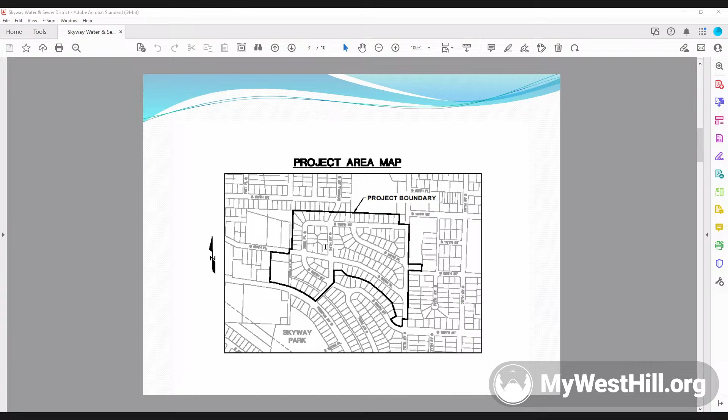Okay, here's the crux of the matter. The sewer mains in this area are more than 70 years old, past their 50-year life expectancy. We've had numerous maintenance issues and backups that have resulted in property damage, and the sewer mains are subject to infiltration and inflow—meaning fluids going into the sewer pipes that don't belong there because the pipes are so decrepit. The water mains in that area are more than 60 years old, well past their 50-year life expectancy. They have a history of repeated breaks, and they don't meet our minimum standards of 8-inch diameter.

The problem with main breaks is that they result in interruption of domestic or drinking water service and fire protection service to your house. There's the potential for water system contamination during repairs, and it's more costly to do repairs on the spur of the moment than when we plan replacement projects.

We've done basically two types of investigation. One is geotechnical borings for subsurface information, and field surveys to locate property lines and where the infrastructure is located.

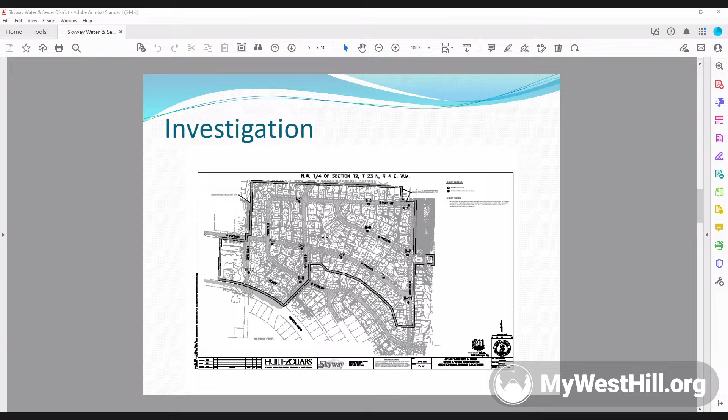What are the solution and the benefits? Well, basically the solution is to replace the pipes and service lines. The benefits are it will eliminate those costly emergency repairs. It reduces infiltration by putting in new pipelines. We reduce the sewage load on our downstream main sewer pump station, which gives us added capacity for development in the upland area, reduces the likelihood of property and environmental damage, and avoids increased costs due to insurance premiums resulting from claims.

Why are we doing this now? As more time passes and the infrastructure becomes older, the risk of a main break or a service interruption increases. The replacement costs for this project have been incorporated into the water and sewer rates over several years, and we have recently, as of last year, secured a low interest Public Works Trust Fund loan through the Department of Commerce.

Here's a very sketchy sketch of what we'll be replacing in that neighborhood. Again, this is a 60,000 foot level, so if it says 34 manholes, we might end up doing 35 or 33. But we'll be replacing the mainline sewers on those streets, along with the side sewers and the manholes.

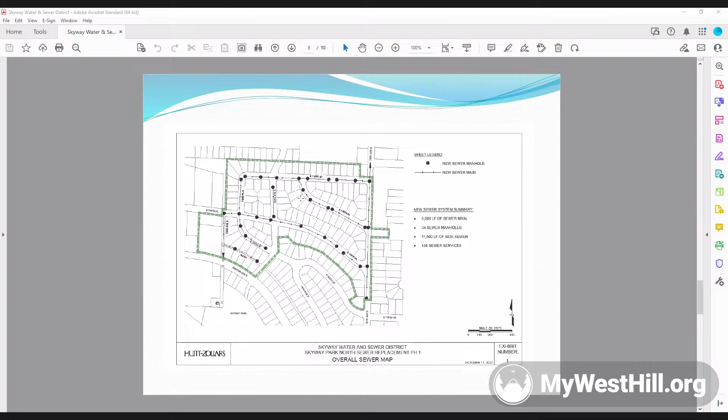To take advantage of this project, and because the water system is also in bad shape, we will be replacing the water lines and the hydrants in a similar area, along with the service lines to individual residences.

Any questions? And hopefully that's within my 5 minutes. Yeah, that was great. I have a quick question.

Your last line, you said you're replacing sewer lines to individual residents. So that means each home in that area is going to get a new sewer line? That's correct. I can't say to every home, Joel. That might be an area where we replace a main line and a property service line leaves the property in a different direction. But yes, we're allowed to replace the side sewer lines as part of a capital improvement project, because a degraded side sewer brings additional flow and other debris into the mainline system. So as a way of protecting a brand new mainline system, we're allowed to replace the side sewer.

Good question. Is there a process for inspecting those side sewers to see who's in more need of getting it replaced? Like maybe it's already kind of fallen apart with roots and whatnot. We will, unless someone declines to have their side sewer replaced, which they will have the option to do, be requesting a right of entry from customers because it will require us to go on their private property, and a property owner has the option to decline that. Or if they tell us it was replaced in the last year or two of their own volition, otherwise we would go ahead and replace it. So it's really the homeowner's choice, but it's to their benefit to take advantage of it, unless they have a brand new side sewer.

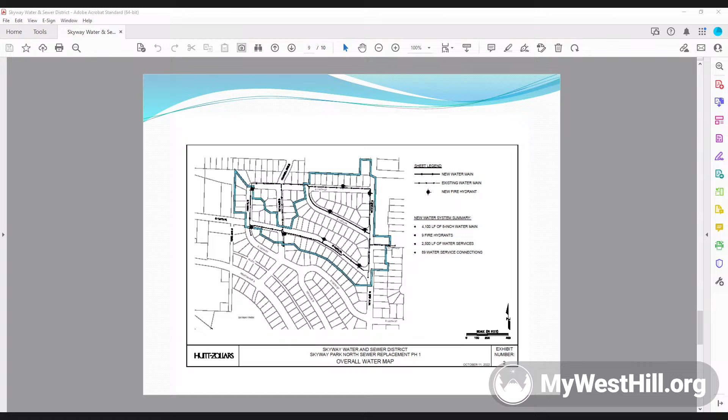So next up, we have an update from the King County Fire District 20 from Chief Hicks. I saw him on—do you have anything to share, Chief Hicks? Sure. Hello, everyone, and good evening. My name is Eric Hicks, I am your fire chief for King County Fire District 20.

Just a quick update: coming out of COVID, we're trying to bring back some of our programs. One thing about coming out of COVID is our call volume has increased. Over the last 2 years, we're looking at about a 26% increase in call volume, which means we're looking at hiring more staff. We're in a budget planning process now, and out of that we're looking at hiring 2 new firefighters who will start next year.

Along with that comes the aid car being in service, and that's something we're kind of dealing with. We're continuing to evaluate it.

Some of you may have seen one of our water rescue team members on Facebook. Some of you may not know, but we do have a water rescue team. It consists of 4 people in our department, one on each shift. So if we get a call down on Lake Washington or Coulon Beach or the Cedar River, there's kind of a regional approach to this. As far as our district, we'll be first on scene, and we can have somebody jump in the water and actually try to perform a rescue.

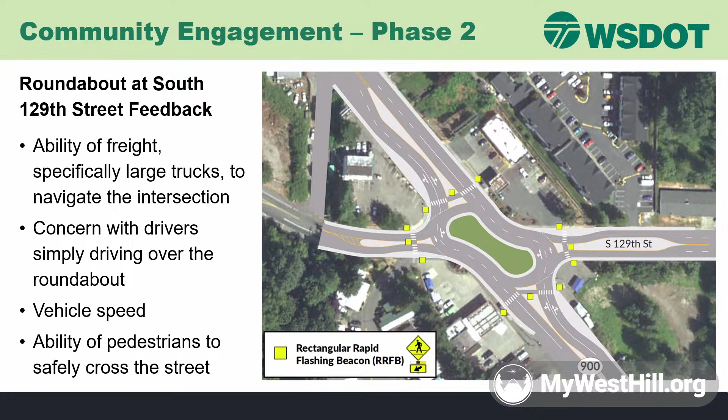There were also concerns, which we've heard throughout, about the speed of State Route 900—sorry, we're doing another study on 99 as well—about how they could slow down traffic on 900 and make this a safer place to be. And there was concern that this would be too hard to figure out for pedestrians crossing the street.

For the protected crossing at Creston Point Apartments, we asked a lot of questions about where people wanted to cross the street. Overwhelmingly, we heard less about where people wanted to cross and more about the concern over the location of the westbound stop and how far away it is from the eastbound stop. A lot of the feedback was that they weren't necessarily worried about where the crossing was—they just wanted that stop moved and the crossing to be convenient in order to access both the westbound and eastbound stops.

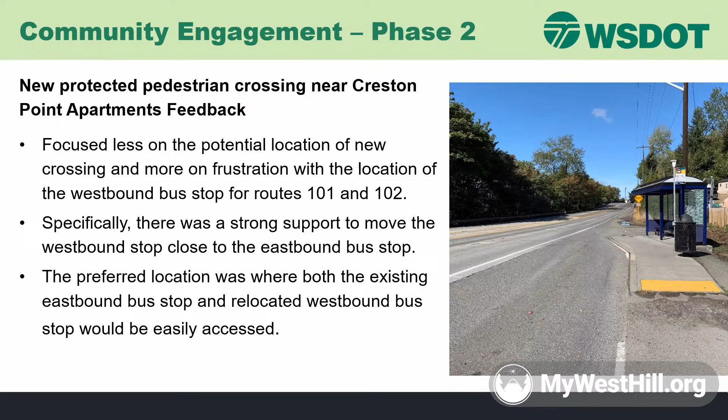A couple of updated concepts and things we can add to the report as we move forward. One of the things we need to add is that this is going to require an intersection control evaluation at South 129th Street.

What this means is anytime WSDOT or any other agency touches an intersection to do something to it—whether it's adding a signal or improving an ADA piece by putting in a bulb-out or something like that—we're required to do what's called an ICE. What that looks like is trying to understand what the best solution is to improve mobility at that intersection, looking at whether a roundabout makes sense and what other pieces we could consider.

As we look through this, if we have a recommendation for a roundabout, one of the important critical pieces is doing that study, interacting, and sharing that feedback to make sure it's the right solution based on a deeper data analysis.

Additionally, one of the details I'd like to add to the report is related to traffic calming. Speed is something we heard throughout this process over the last two years, so emphasizing and adding information on how this could become a way to slow traffic as it's entering the community. As you get off I-5 and come southbound, there's very little to slow down the traffic, especially if the light is green and you can go straight through. So this would help with that piece.

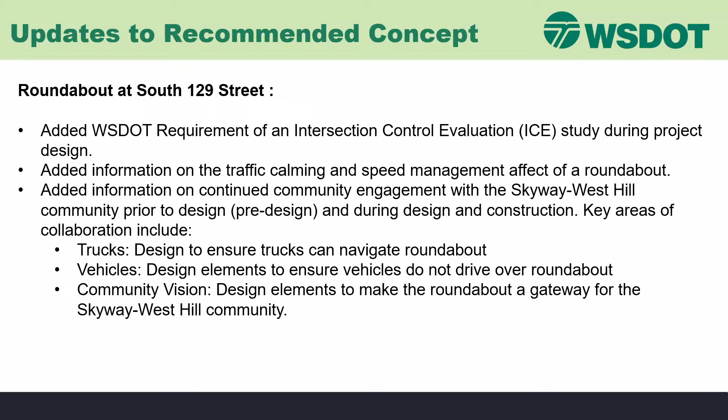Fundamentally, one of the big pieces that really resonated when I heard it was making sure the roundabout is a gateway to the community that is led by the community. Those are the pieces I think would be important to add, so we can give some depth on what the next steps are for the 129th intersection. First, to assess if it's the right solution by doing the required analysis. Second, to make sure there is community engagement every step of the way as we determine the right solution, and as we determine what we could do to make this roundabout really reflect the Skyway and West Hill community areas.

Another piece that's come up, one of the efforts WSDOT has been really emphasizing and coming through legislation, is making sure we're providing facilities for bicycles and pedestrians. So one of the edits to the report being recommended is to widen one side of the roadway from 8 feet to 10 feet. This would allow that side of the street, the north side, to better accommodate those who want to both bicycle and walk, so bicycles don't feel like they have to use the street and compete with vehicles.

Additionally, an added nuance is making sure we add the requirement of an ICE at South 133rd Street. The report and recommendation recommends adding a traffic signal with protected pedestrian crossings at that location. Because we'd be touching the intersection, we'd also have to do the same evaluation we would at 129th. This would involve coordinating with the community to understand the needs, and looking at data to confirm a traffic signal is the correct solution for that needed pedestrian crossing.

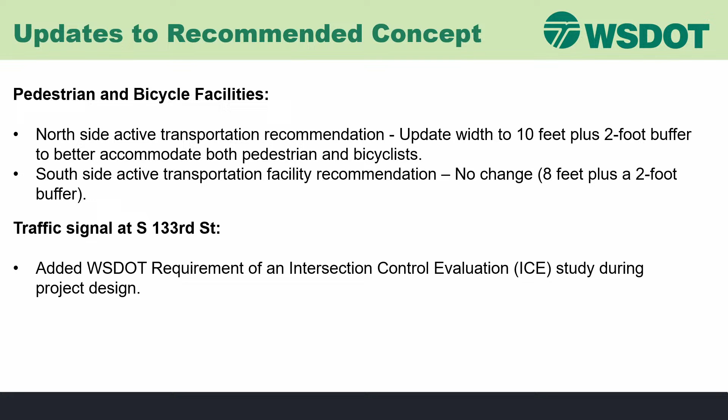And lastly, the vicinity of Creston Point Apartments. We're not going to put a specific location on it. Originally we had a line in the report showing where the location needed to be. It became crystal clear, based on feedback, that it was important to move the bus stop and open the crossing to serve both the westbound and eastbound stop. Until we can continue coordinating with Metro to understand where they'd be willing to put the bus stop, and how close to South 135th Street, which is the preferred location based on community feedback, we can then site the exact location to make sure the new pedestrian crossing serves both the relocated westbound stop and the eastbound stop.

So we're going to put in the report a recommendation to coordinate in order to move that stop, and then choose the location based on that relocated stop, so that it's convenient to access both of those stops.

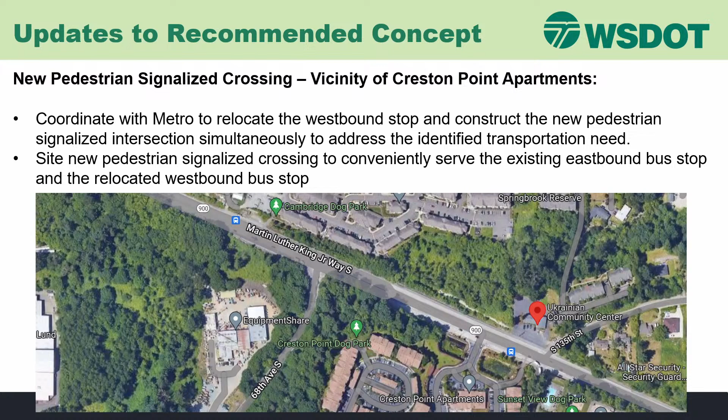So next steps, one of the pieces that I really want to emphasize and put in the report is the continued need to understand the community and what's important as we look at some of these recommendations, the need to start seeking more funding for this, and also the need to start looking at design elements.

What are those things that are critically important, like the gateway at 129th? How do we make that work with whatever comes out of the ICE report? The crossing, and how do we work with Metro?

Those are the next steps, what we could consider pre-design, where we're getting those design elements, doing survey work to understand, and looking at the ICE report and coordinating with the community based on some of the data coming out of that.

Additionally, we would need to update this report. This will enable us to start seeking funding to keep having these conversations and design what needs to happen in these locations, and also incorporate it into some strategies and partner plans as we move forward.

I think one of the big pieces is we are still in the running for designing the north side 10-foot shared use path, as well as the 2-foot buffer to make sure you're separated from traffic. I'm hoping we hear that we were able to secure funding by April or May of next year, but we'll continue to seek funding in other locations.

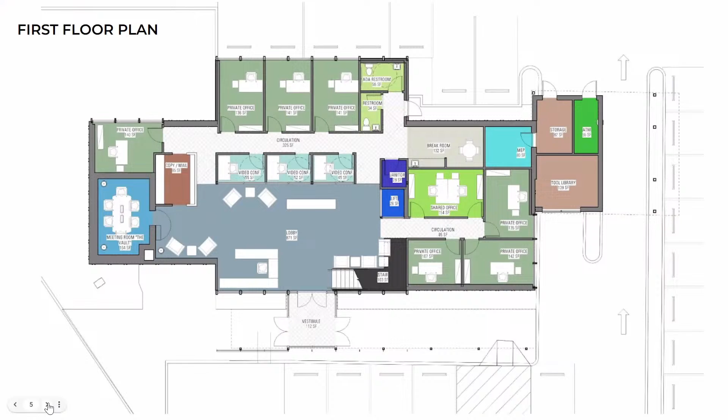The other piece here to note is the stairwell. The stairwell will be moved from the back of the building to the front of the building, and be replaced by an ADA restroom in the back. And again, with this stairwell, it's not pictured here where it will be, but there will be a lift for ADA accessibility.

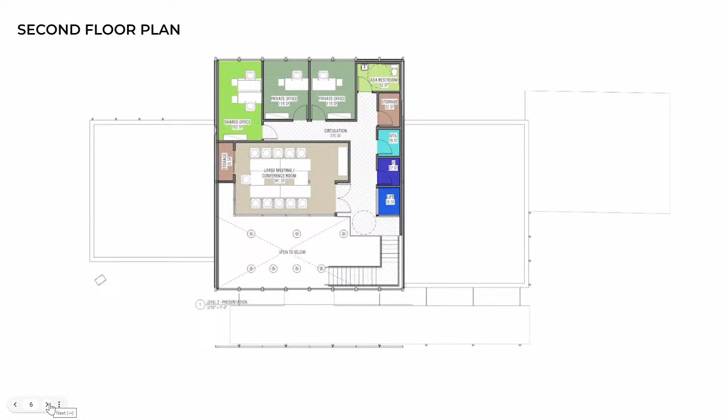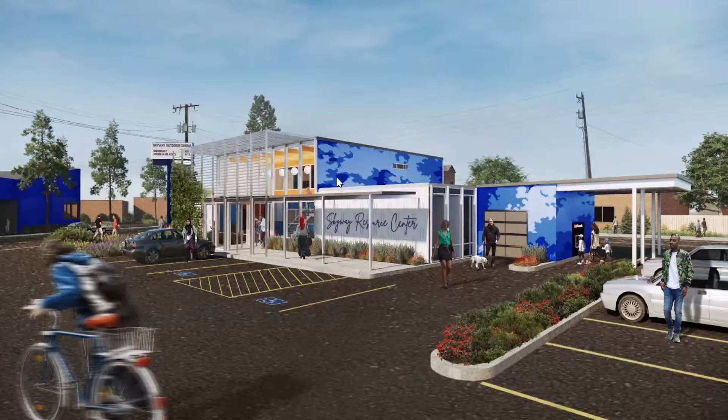Side view here, looking from kind of the post office and 7-Eleven corner. There is a ton of canvas on this building because of the really straight lines and flat surfaces.

So one of the things we're really trying to activate is art in the building, on the building. We have not decided, and it's not just up to the core team to decide — I continue to say this to them as well — how often do we replace murals? If anyone's familiar, or if you wanted to look up Wynwood Walls in Miami — I only say this because I went to school down there — Wynwood Walls has a ton of wall space, and they always do really large murals, but they're actually rotated in and out every couple weeks or couple months. So I just say that to say, I'm not stuck with an idea that once we put a mural up, it has to stay forever. There's so many artists, from our students to adults to our elders, who I think contribute in different ways.

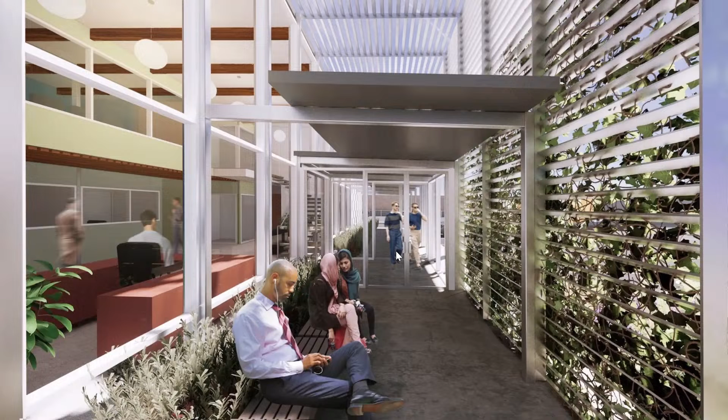In another photo here, this is the walkway, where there's currently just a covered area, but with this added vegetation wall to the right. This would help with shading in the summertime, and with insulation — the building has zero insulation as it is right now.

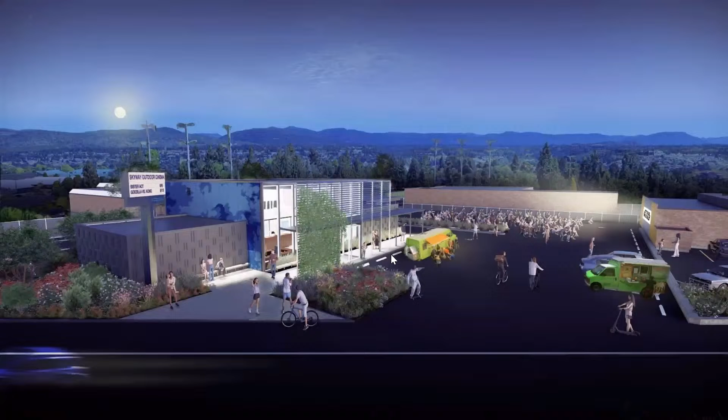And a rendering of the outdoor cinema, which is pretty cool. So again, activating the outdoor space. And again, not just the outdoor cinema, but the Urban Food Systems Pact Farmers Market, their first one being next Sunday. So I think, again, a lot of different opportunities here to activate for different things.

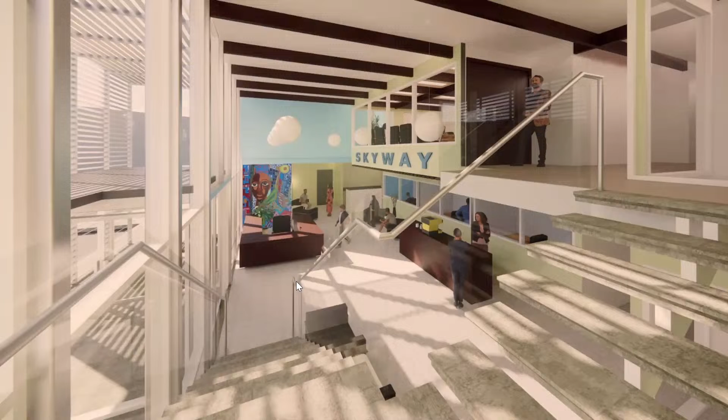This is a photo from the lobby. Again, more art on the inside. This is just an example — so they put Skyway here, but again, it's not set in stone that it's going to look like that.

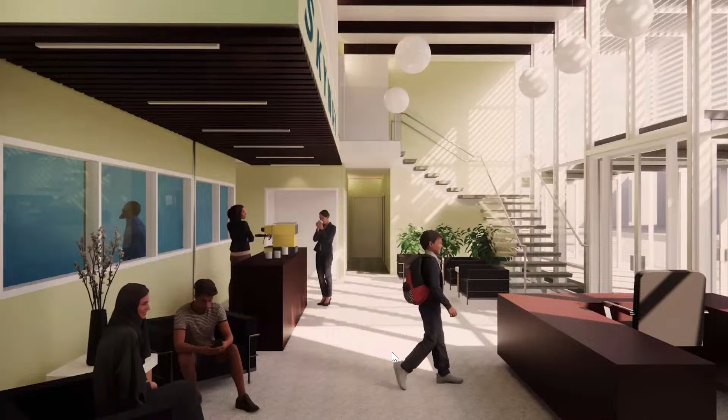However it's branded, I think it's still up to the community to decide. We have still a lot of decisions to make in terms of how the inside is decorated. Also the lobby opposite — again, what's not pictured here is where the lift will be, so that was something that would still be included.

This is the upstairs conference room. And then the windows to the right are looking over the lobby.

That's it for this slide. The last thing here is we are looking for more artists. I think we have 6 or 7 folks who have submitted information. But we did just secure a $50,000 grant from 4Culture that'll go towards our capital funding to build, whether it's racks on the outside, display cases, or gallery walls on the inside to display art. So if you are an artist or know of anyone, please fill out the form.

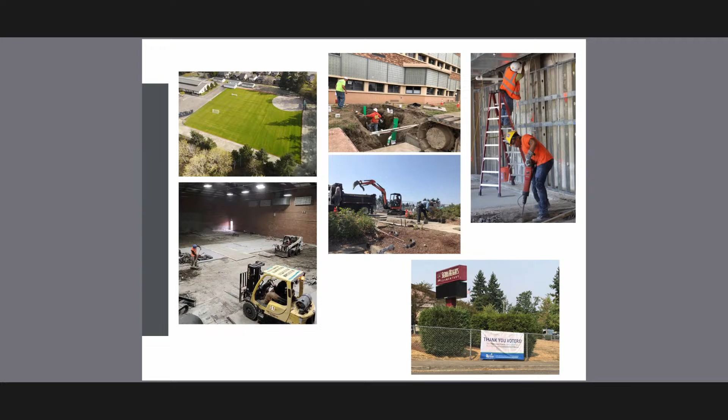Our voters over the years have overwhelmingly approved these school construction measures by 62, 64, and 72%. In 2019, we actually received that 72% support by voters. I think anyone who's run for office or helped manage campaigns understands that 60, 72% means voters are overwhelmingly in support of what you're doing. And with that support, we've been able to replace and improve our school play fields, our high school gyms, and lots of work throughout the district.

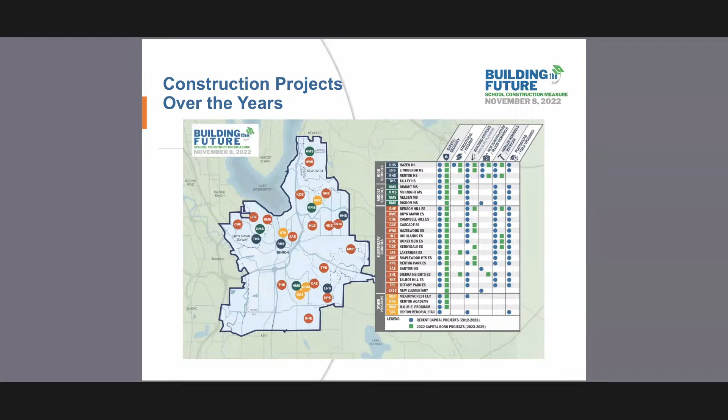Let's take a look at what some of that work is that's on your ballot. Safety and security is always top of mind for our school district, keeping students and staff safe. Our locking systems in schools have improved over the years and we want to continue doing that. All of our school classroom doors lock from the inside.

I do want to mention that we don't want to harden our schools, right? We don't want to create schools where parents can't get in to pick up their child to take them to the doctor or something like that. So we have to balance the safety and security measures with reality, and that means allowing access for parents and staff who come in through the day. We have staff who go to various buildings for specialized care of students, and they need to be able to get in and out of schools. But safety and security is very important. We want to continue improving our locking systems, our key entry systems, and these vestibule openings to schools.